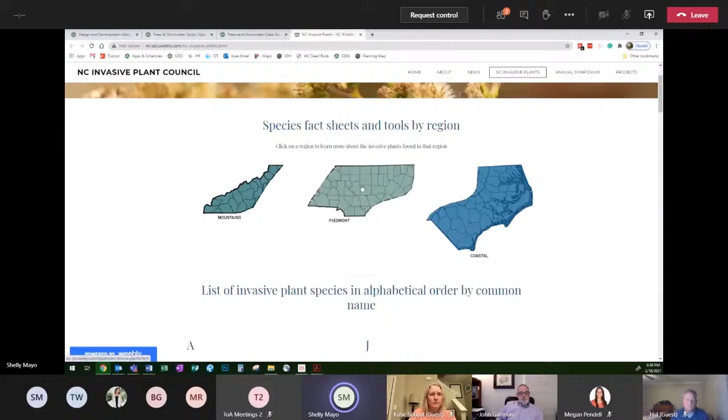Just to give you an idea of what that looks like, if you come to this website, you can get the invasive plants for all of North Carolina, or you can get just the Piedmont. I've gone through and taken all of the invasive ones off of our list. We don't have anything for herbaceous perennials, aquatic plants, or vines at this moment, so we focused primarily on the trees and shrubs right now.

If we get requests to add additional lists or decide that there's a need for it, then we'll make sure that these items are also addressed as well. So without further ado, excuse me.

This is also - these colors and everything are all using our branding survey. This is just to give you an idea.

As I said, native species are first. And we've got our introduced adaptive species, and we decided to label them that way because they are not on the list of invasive species. Now, any introduced species has the option or the possibility of at some point becoming invasive, but we don't have that information yet. So that's what we've decided to call them on here.

We've got our medium trees, which is a height of 30 to 50 feet. Small trees.

We did go ahead and label pollinator and bird-friendly trees as well. Primarily did that with the native species, just because generally that's what we want to recommend and encourage when we're thinking about plants to put out for our pollinators or for our birds. And these are not just plants that have flowers and have nectar - they're also the plants that our pollinators can lay their eggs on and feed their larvae off of, like your caterpillars and things like that.

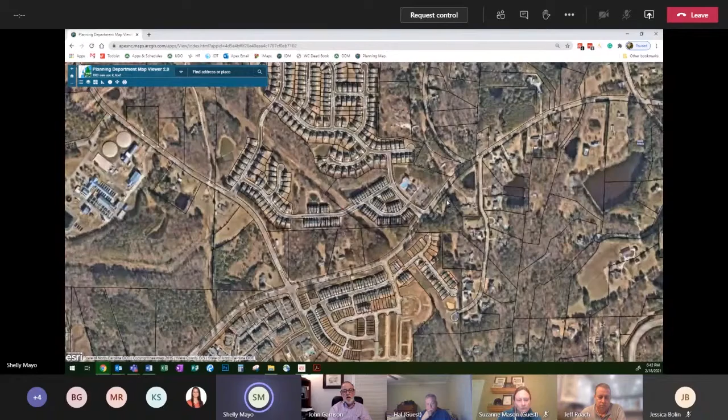And there's sidewalk along both sides. There's sidewalk along the southern side that's been built by Westford. And then if and when these parcels develop, they will also be required to provide side paths, so a 10-foot side path here, and sidewalk is what's required here. Correct. These are, I know it's sometimes harder to see when the aerial comes up. This is the McMains parcel, and this is the Hobbs parcel.

What's currently on that? Is it both houses? House. Mm-hmm. Yep. Okay. All right.

The sidewalk will be required on this property. And Katie, that's what we talked about - we'll have to adhere to the UDO, to the transportation plan, to the Parks and Rec plan. Those are things we're getting into with due diligence for the owner, to understand his exposure and what he has to do.

Just to give you an idea, this is what the side path on the north side will look like, the opposite side of the street. And this is what the sidewalk on this side will look like. I like visuals - they help me, and I figure they help other people too.

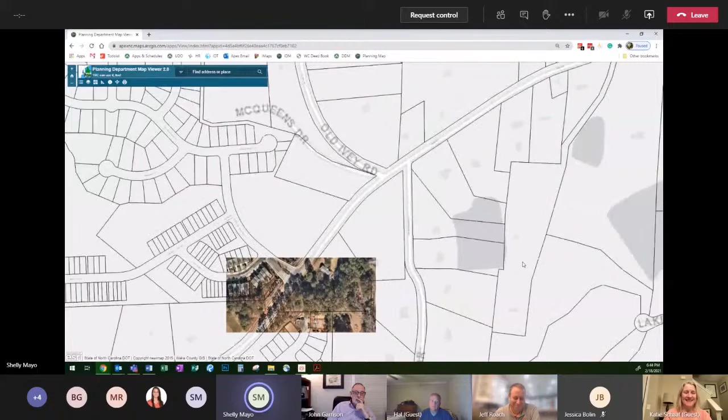Any board members have any comments or suggestions or anything like that?

Mike Rusher here. I really appreciate the comments on the sidewalks because this is a potential development with a couple plots together that's really sitting smack dab in the middle of a residential area. So you'd be going from house to house to a potential business at this site. I think blending in as much as possible, the continuous look, is important. Sidewalks help with that, buffers help with that. I know we're limited on information available at this point, but every little bit helps - it's almost 100% residential right here.

Mike, real quick - and Shelly, I think can back me up on this. This land is actually set up as a mixed use parcel, which would allow some residential, but would also require non-residential to go into the parcel. We are proposing 100% non-residential on the piece, which matches the 2045 land use plan and is a permitted use on that plan.

Yeah, it's actually shown - the orange, which is high density residential, the red, which is retail or commercial services, and the blue, which is office employment. So we've gone the route that this is a good location for neighborhood business, which could be a vet hospital, a small office building, something along those lines.

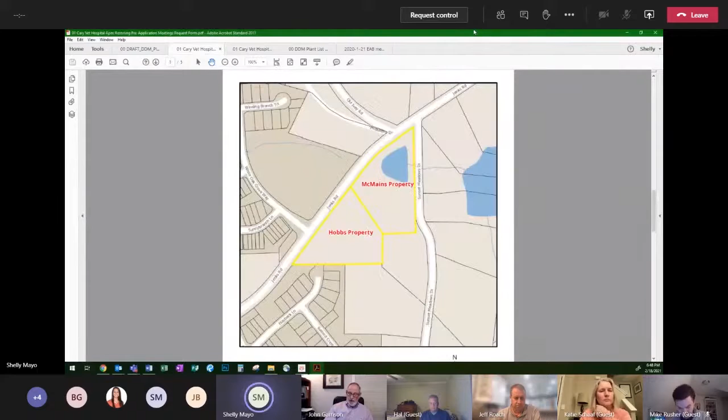Being right next to these subdivisions and stuff, there's going to be a big potential for that light to glare onto those adjacent properties.

I'd like to see maybe something from y'all focusing the light onto the ground and minimizing the blue light and reducing the color temperature of the outdoor lights. That's something y'all can do?

So what we typically recommend is that the non-residential users actually rent the poles from the town of Apex. We work with Rodney Smith in the electrical department. I think the town is doing almost all LED light installation these days.

As such, we do a lighting plan that is required to have the photometrics, all the point photometrics around the site. That is something we will definitely look into. Shelly and I will talk more as we go through the site plan process, and we'll bring electric in a little bit earlier than we may normally do it to get Rodney's input as well. But that's a great point, Mr. Garrison.

Mr. Garrison, the UDO actually does require that any lights near a residential property line have external house side shields on them. It doesn't prevent everything, but it keeps people from having as much glare onto their property.

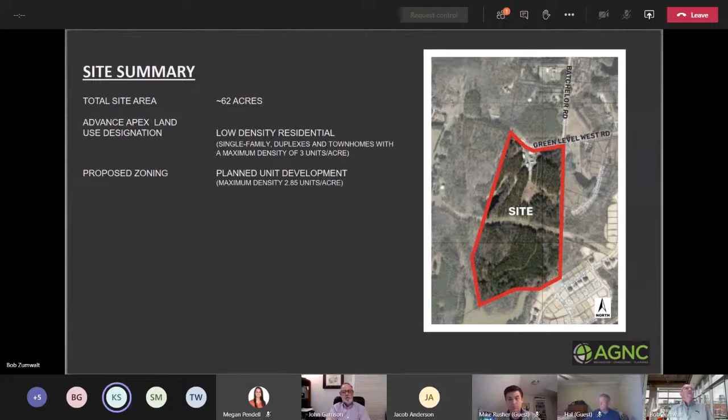Let me go to the next slide. The site is 62 acres, give or take. The Advance Apex land use designation for the site is low density residential. According to the town's comprehensive plan, that calls for single family duplexes and townhomes with a maximum density of up to 3 units per acre. That's what the ordinance suggests. Our proposed zoning would be a planned unit development, and we are currently going to be submitting with a maximum density of 2.85 units per acre.

Next, I wanted to show you this map, and I just flipped the map to the right because I can blow it up a little better. So north is to the right. Green Level West Road runs along the north here now, so Lake Castleberry sits at the bottom down here. We've had S&EC, Soil & Environmental Consultants, go out and do a wetlands and stream determination.

You can see their preliminary results here. Everything you see with this kind of green shade is a buffered stream. The hatched pattern here is a wetland. These will all need to be surveyed, but these are GPS points from our wetland consultant. So we've got a stream buffer here, an existing farm pond with a buffer around it, and then additional buffer and a jurisdictional channel located here, and then a stream that runs from Castlewood through into Lake Castleberry.

You can see our property stops just short of Lake Castleberry. This land over here is owned by the Castleberry Homeowners Association. So what you see shaded as environmental features, we are not going to be disturbing any of those features other than having to make one required roadway connection across this creek to pick up the road that's stubbing out of Castleberry.

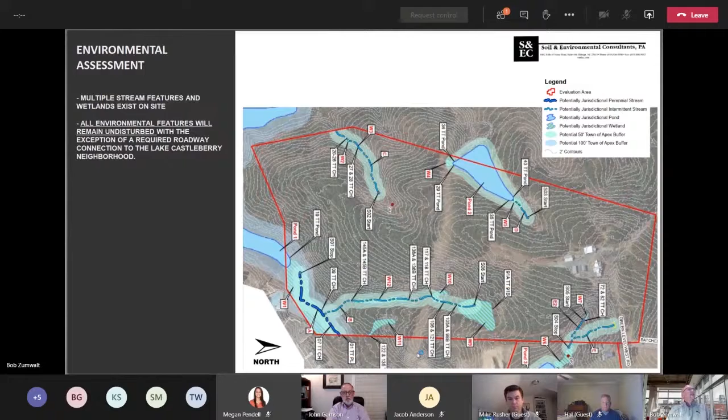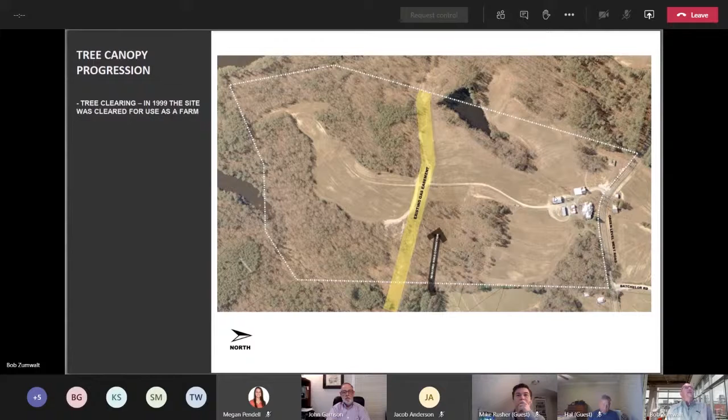Now I'm going to go to the next slide and just kind of show you roughly how this overlays. The green areas you see here are the areas that we intend to preserve, so it's existing preserved canopy. There was one question I think that Megan sent us. Yes, the areas in green, we do not intend to disturb at all. They would be preserved vegetation with the exception of that road connection, which we're required to make. There are some champion trees up along the frontage that will also be preserved.

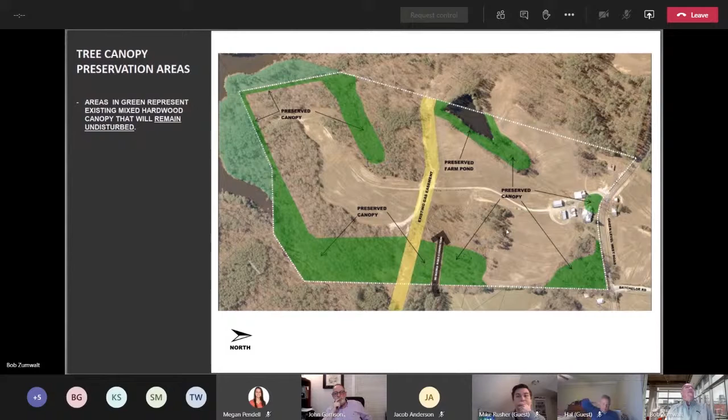Moving forward, this is our bubble plan, and I've added a little more detail to it. Can you guys see that okay? So the areas in yellow outline the area we anticipate development occurring. They're outside of all these environmental areas.

I'm going to list some of the design features we're anticipating. We're still working on the layout of the neighborhood. I've got some trash paper sketches, but they're still kind of sketchy, and so this will indicate some of our thinking.

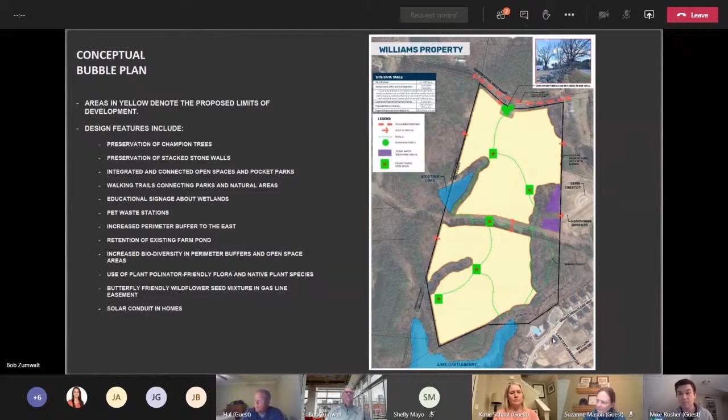Oh, I gotcha. My second comment was on the southern part of the property, coming up against the neighborhood—looks like Grand Highclere Way. Looks like there's an HOA pool and a strip of houses down there. I'm just looking at the satellite image right now. It looks like the woods are pretty sparse. There's a stream cutting through there, behind the neighborhood. I'm a little concerned about that buffer and development coming into those backyard viewscapes. But have y'all thought about—I haven't thought too much about this, so warning—have y'all thought much about increased plantings in that area?

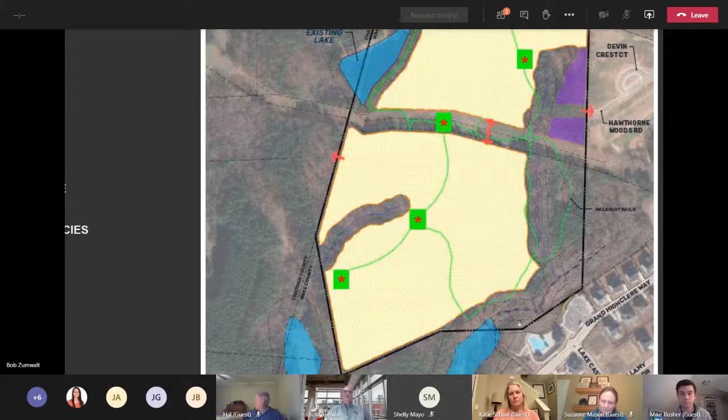One thing the board discusses almost every meeting is the importance of buffers between neighborhoods and different uses. The reason it looks a little more sparse here is it's probably full of hardwoods, and this is a winter photo. But the distance from this pool to this yellow buffer is 200 feet. These are 50 foot sections - another 50, another 50, another 50 - so we'll be somewhere north of 200 feet away from that with anything going on, and that's all protected stream buffers, so we really can't get in there and plant in them. 200 feet is a lot of distance through canopy trees and stuff.

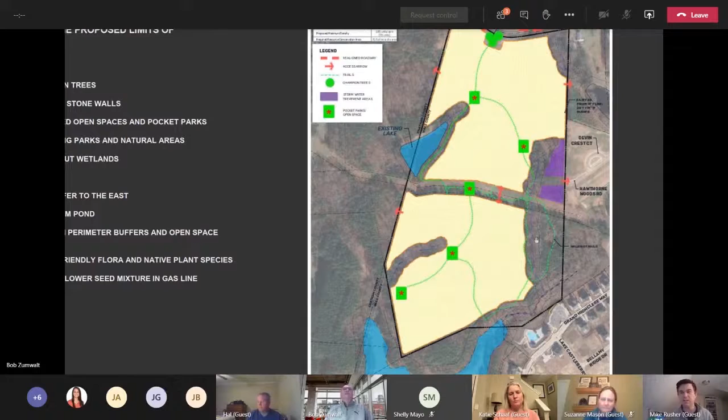And it's a little deceiving. I'm looking at Google Earth right now, and who knows - the green areas could be much more green and filled in than your map is, and that gray area seems to be a little more sparse than what your map is. So when we get the tree survey, it'll identify all the trees in there, and we'll take a look when we get them. Mike, if you want, I can share the town's aerials - those are from last month.

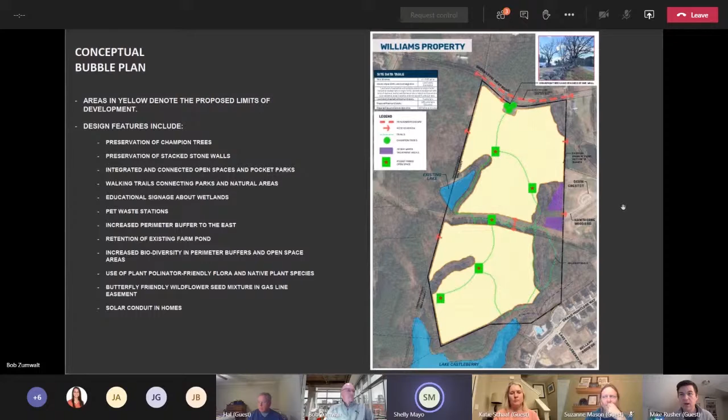I just wanted to go back to Bob's answer on the buffer. With that buffer discussion, are you saying it's kind of wait and see? Yes, sir, there's going to be a lot of trees in there. It's just hard to see because it's a winter photo, but we'll take a look at it when we get it. We can't go into a protected stream buffer and plant in there and disturb it. So yeah, there you go, you can see it there. Looks like the trees are very thick.

Yeah, see the stuff that looks gray? Those are hardwoods - maples and oaks and willows - and the green are pines. If you were to look at this in the dead of summer, it'd probably all look pretty green. Actually, one of the tricks I've found for figuring out how thick they are is to look for the dark lines, the shadows on the ground, and you can kind of get a feel for how many big trees there are and how thickly they're planted.

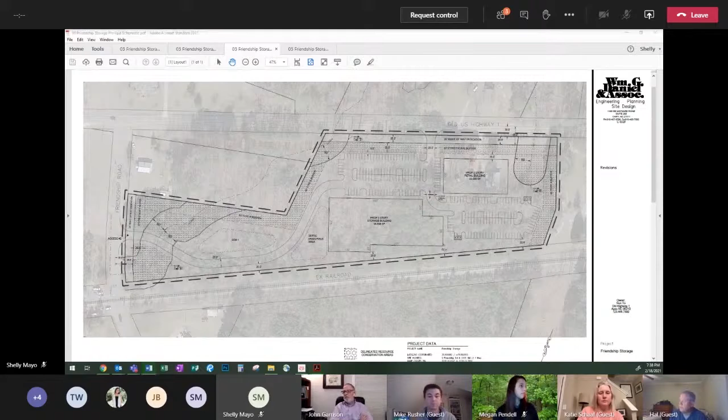Gentlemen, good evening. Hello. Hello there. Thank you for joining us. Sorry we're running late, we had some technical glitches in terms of being able to put this out on the internet earlier. So we are hoping to get some information about your project in terms of being able to provide input to town council on environmental aspects or improvements we can recommend regarding your development. So if you could give us a little bit of background on your development and what you're trying to do, that'd be great.

Okay, well, it's comprised of 2 parcels. It's about 9 acres, and it's out in West Apex off of old US 1. It's zoned rural residential, and we're looking to rezone it to Tech Flex for uses that would encompass retail and storage. That's the gist of it right there, and I'll answer any questions that you have.

So you're going to have one stormwater pond on the west side, that sketch is very schematic. The topo kind of breaks in the middle to where it may end up with two BMPs, it's just not known yet. We're still waiting on our environmental assessment, and that'll shape some of it. Okay, so it'll be on septic, it looks like. I'm trying to figure out which way water's moving across the surface here, where's the high point on the property? Where the big building is, basically. Okay, yes sir, I would say the ridge is up at the corner of Friendship and the railroad, and then it goes towards old US 1. Okay, yeah, all right.

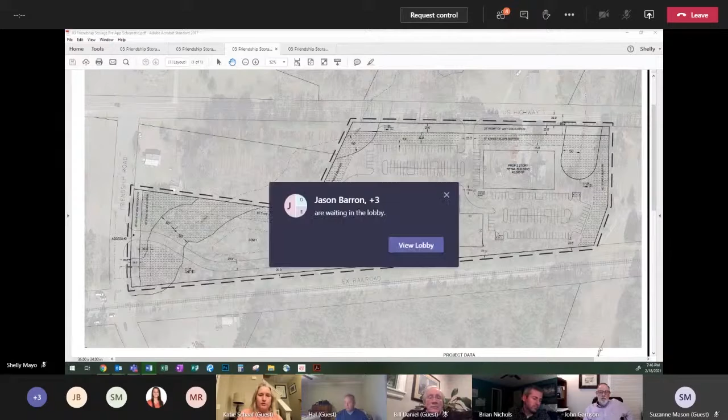Anyone else? There are really two big opportunities here. One would be for a building like this that's going to be long and flat - it seems like an opportunity to have solar panels on the roof. And then just for me personally, knowing this area pretty well, I would love it if you'd consider increasing the buffers, because I do consider this area rural, and this feels like a real change to the character of that area.

Okay. I know that the site does have environmental riparian buffers, and we've got right-of-way dedication to deal with, and we do have buffers around the majority of it. The site is kind of constricted, so we can make an effort to give additional buffers if that's what we need to do, but 40 foot type A buffers should be a pretty good buffer - that's what the code calls for. And I guess I could also point out on the west side of the property over by Friendship, a lot of that land's shape is just not conducive to getting anything in there, so a lot of that's going to remain vegetated and undisturbed anyhow, if that's any merit to you. Sure.

Hey Brian, appreciate that answer. Mike Rusher here. Especially on that west side where the buffers are - and part of my ignorance here - would y'all typically come in and wipe everything out and then replant in the buffer areas, or would you try to leave what's existing there? Are you talking about the perimeter landscape buffers? Yes sir. We would try to leave as much there as possible and then supplement.

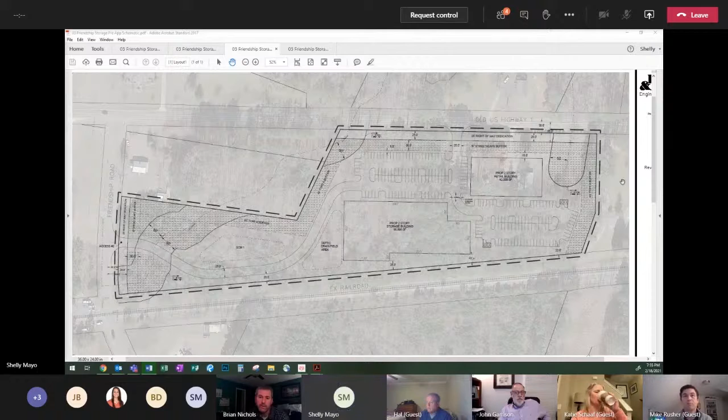Some of that area is cleared already up by Derek's yard. He's got like a horse run out there, so some of that 40 feet over there is cleared. So over on the eastern side, on the retail side, more center. On the west, that is vegetated. Gotcha. Yeah, I'm riding along with you on Google Maps right now. I can see where that's cleared out on the eastern side.

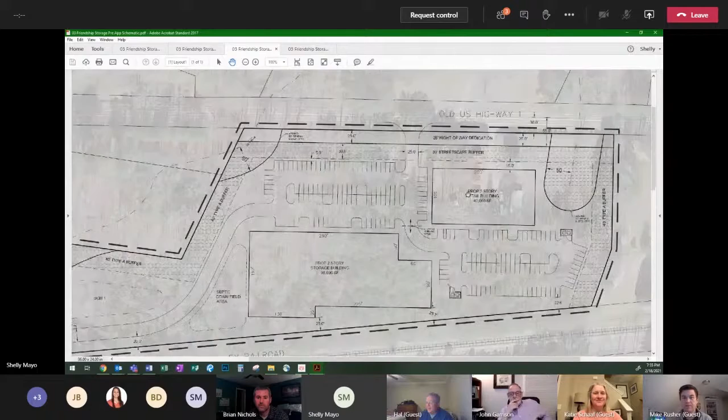Yeah, those were my additions, Megan, for recommendations, and if the board wants to adopt that, that's great, but that's my only piece. I could go with that, and I like John's idea about the shielded lights, so we're not illuminating the area, residences, and everything like that. I don't know if that was your idea, John, or maybe that was Suzanne's. I don't know, in terms of the lighting, but I think that's a good recommendation.

Anything else from anybody? The commitment on the rooftop solar, some percentage. I don't know that I have a number, or I don't know that he'd be willing to commit to a number, but I think if he's willing to install rooftop solar, then as far as I'm concerned, that's what I would be recommending. Yeah, I think that would be a big step. Yeah, absolutely.

Can I toss out a question for you guys? Sure. This is my first time doing an EAB board here, and they asked for a list of things that we would consider, so I threw out a few things. Is there like a minimum that we need to meet? I'm hearing lights, I'm hearing solar, and I'm hearing vegetated buffers. Can we settle on 2 of those, or 1 of those, or is all 3 what you guys are shooting for? Just trying to understand it.

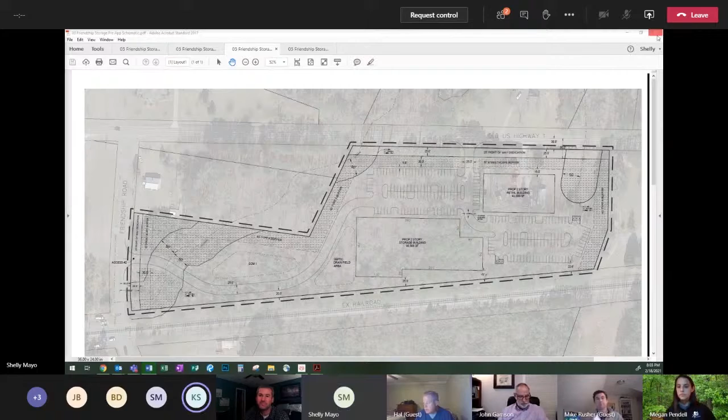All right, is everybody doing okay before we bring in the last developer? Anybody need a break or anything? What I'm getting at - let's get her done. Let's all get it done.

I agree. Just as a quick FYI before we move to the next one - the comment letter that went out with the Chapel Ridge townhomes was actually for a different portion of Chapel Ridge. It was not actually associated with this particular project, so some of that you can disregard, some of it you can pay attention to. I've also been notified that the layout has changed to some degree because of some environmental features that were shown, and it's possible the applicant might be willing to share that with us. Thank you for updating that, Shelly. Welcome.

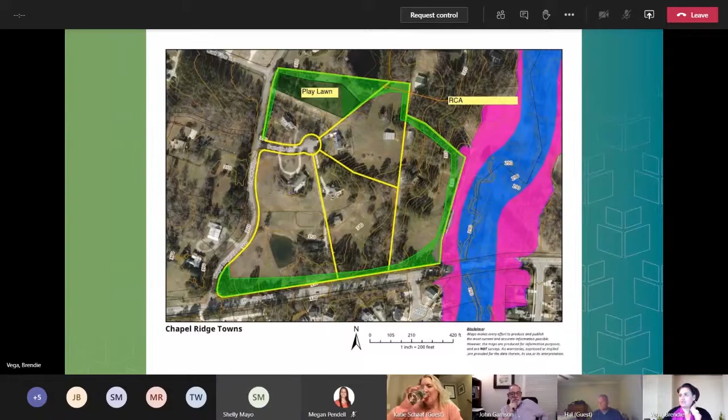We did go through the list with Toll Brothers, and Dan has committed to the items we sent in advance of the meeting: install signage near environmentally sensitive areas to reduce pesticides and eliminate fertilizer.

As far as planting and landscaping, increasing biodiversity, we include planting pollinator-friendly flora. That shouldn't be difficult. And planting native flora, referring to the Apex Design and Development Manual. For green infrastructure, again, we don't think it would be a challenge to provide diverse and abundant pollinator and bird food sources. I'm guessing those are also being incorporated into the Design and Development Manual. If not, we have a great landscape architecture team that can pull those plans together.

Including landscaping that requires less irrigation, we do plan on using warm season grasses, and we can commit to planting at least 3 different, if not 4 or more different types of tree species.

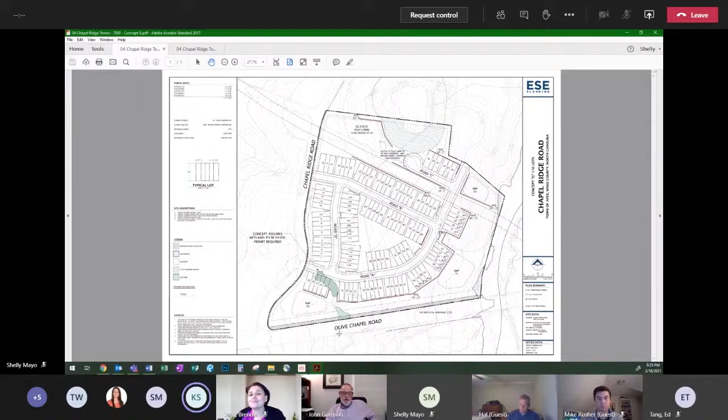Sorry, I was on mute. The solar conduit in the building, definitely know that's important to the town council as well. And this home builder, Toll, is willing to provide the EV charging outlets as an upgrade option. So yes, those are things we considered. We considered all the items on your list that was sent, and those were items that we thought this project could commit to.

Or at least consider. So y'all are willing to commit to all these? I believe so. I don't want to speak for Dan, but I believe that's the intent. Okay.

Yeah, and I'll chime in. This is Jason Barron with Morningstar. We discussed the list, and having this list as early as we've gotten into the process is incredibly helpful to inform applicants like us in terms of the priorities of the Environmental Advisory Board. I know this is a new process for you all as well, so we appreciate you working with us. But those two items, the items that Brendie presented, the complete list, including the two items you talked about from an environmental efficiency standpoint, are absolutely items that will be included in the zoning case. Yes, sir. Thank you.